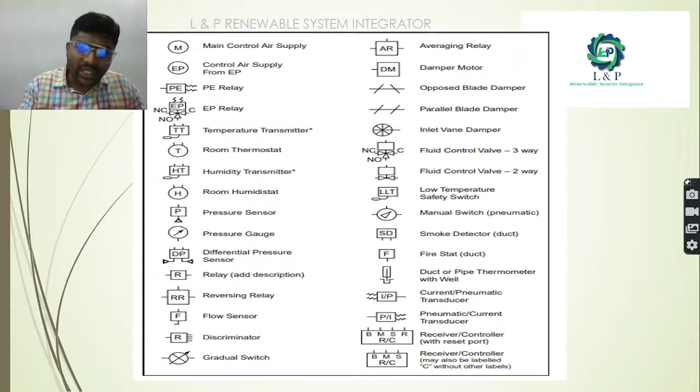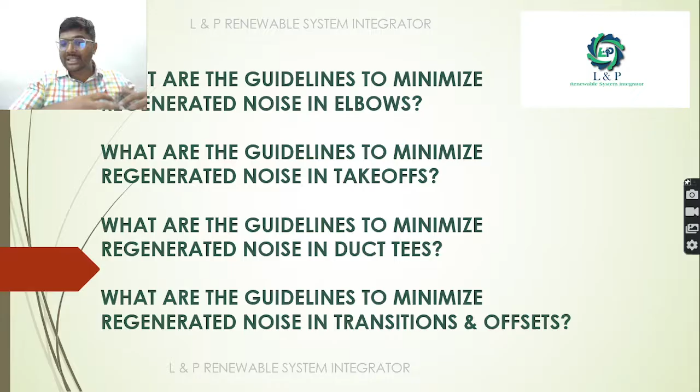So in our discussions, we might be using many symbols, acronyms and short forms. If you have any doubt when listening to the video, kindly refer to this part so that you can clarify yourself. And most importantly, what are the things that we are going to discuss in this part today? What are the guidelines to minimize the regenerated noise in the elbows, and what are the guidelines to minimize the regenerated noise during the takeoff and also during the duct tees? And also we are going to learn the guidelines to minimize the regenerated noise in the transitions and offsets.

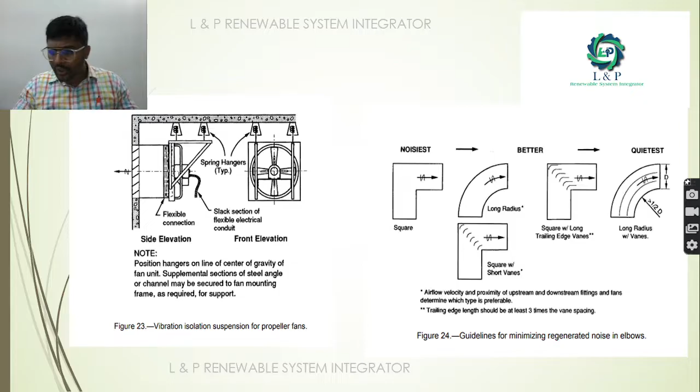So as you can see here, in the elbow, if you want to reduce the noise, try avoiding the direct square bends. Instead of that, you can have a long radius type, or you can have long trailing edge vanes or short vanes, so that you can have a better performance. If you want the quietest operation, try to have a half D bend long radius type. So always try to use these elbows; it will have the quietest operation. If you want a better performance, you can use this. Please don't use this one, it will create noise.

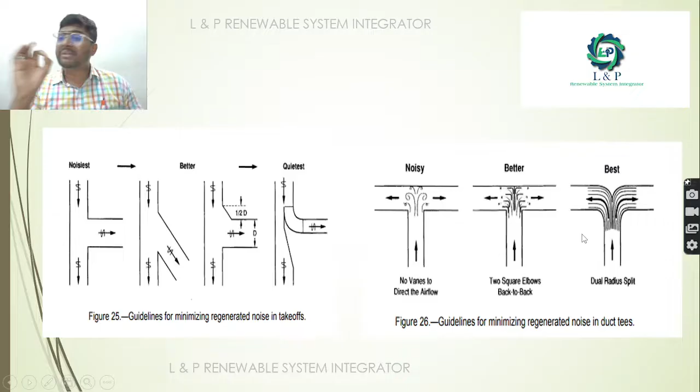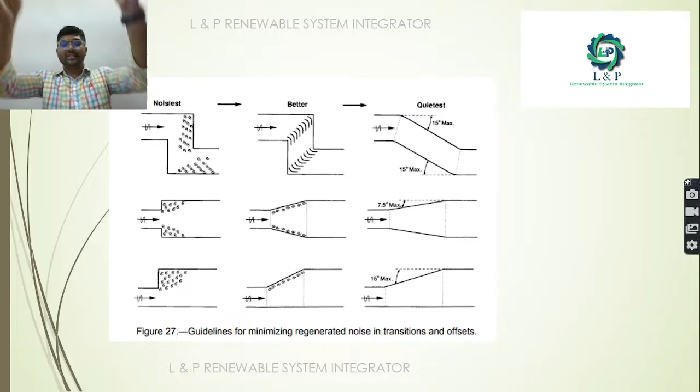And when we are going for transitions and offsets, if you go for direct squares like this, it will create much noise. And most importantly, when you expand immediately, it will also create noise. If you are expanding at the top alone, it will also create noise. So in order to avoid this, you can have diagonal bends, or gradually open it and increase it. So if you're increasing the duct size and want to reduce the transition and offset noises, gradually increase it diagonally. So this is how you need to increase.

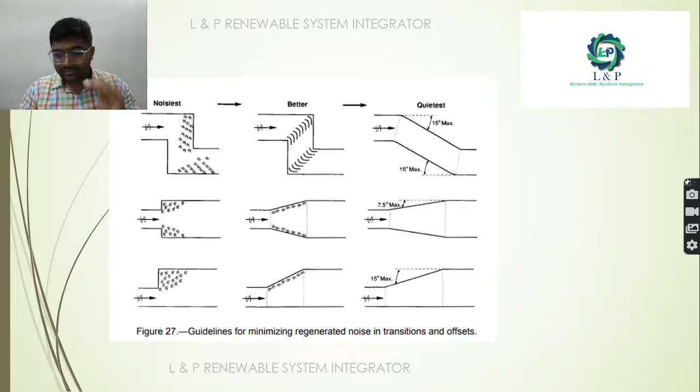For the quietest operation, you can have a 15 degree maximum, or you can go for a 7.5 degree diagonal, then have your transition offsets like this. If you create the transition offsets with these angles, 15 degrees or 7.5 degrees, you will have the quietest operation.